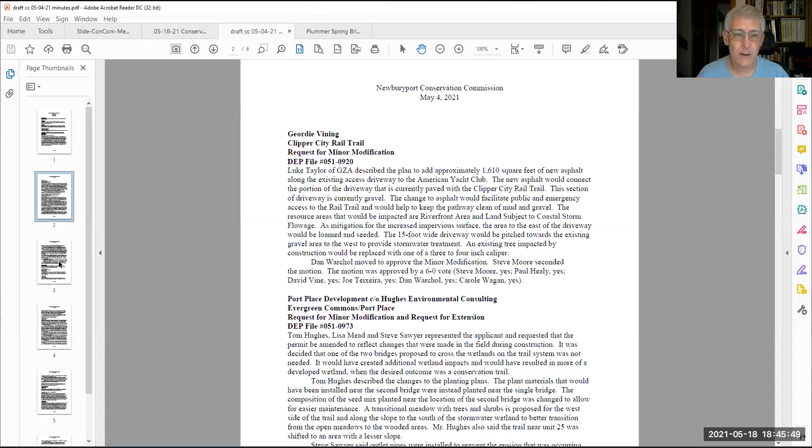One thing I have is I talked with Julie earlier - Gloria Brownhart, spelled Braunhardt, Gretchen. So if we can make that change. I think I pasted it from the agenda. You did, because I'm the one who spelled it wrong. I apologize.

Anybody else have anything? Motion to approve the minutes?

Second. Roll call: Paul Healy, yes. Steve Moore, yes. Dan Warchol - oh, Dan's not here, duh. David Vine, yes. Ron DeCola - I think I have to abstain, I wasn't at the meeting. Is that right? I think you can. Okay. Carole Wagan, yes. And I vote yes.

All right, next item is Plum Island updates. We have anything? We don't really, unless David or anyone else can think of something. We don't have any updates in terms of permitting or projects out there, work proposed or taking place.

Yeah, there's an MRBA meeting, I think it's next, the 4th. Is it the June Friday? The 4th. Yeah, a Zoom meeting. Okay, yeah.

And I assume we haven't heard anything further on that project. I guess it's with MEPA now. Julia, do you know if there's anything further? Yeah, no, you're right, David, it's with MEPA. The ENF has been submitted.

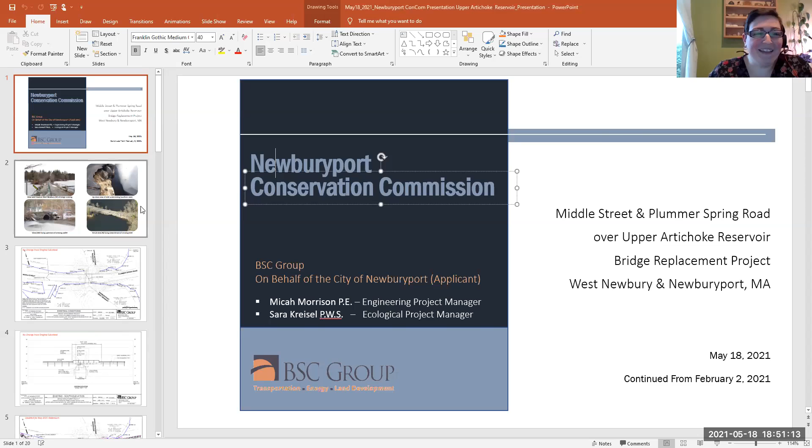Sure. The project straddles the municipal line with West Newbury, and an NOI has been submitted separately for the work proposed in the town of West Newbury. The proposed project is for the replacement of the structurally deficient bridge crossing of Plummer Spring Road over the Upper Artichoke Reservoir, which was closed in 2018 to vehicular traffic due to undermining of the paved roadway foundation. West Newbury has secured a $1 million MassWorks infrastructure grant for the design and construction of the replacement, and Newburyport has secured a $500,000 MassDOT small bridge grant for the design and construction of the replacement.

The NOI before the commission has been filed for impacts to bank, land under water bodies and waterways, bordering land subject to flooding, the 200-foot riverfront area, and the 100-foot buffer zone to bank within the city of Newburyport as a result of the proposed work. The project was previously presented to the commission on February 2nd of 2021. Commissioners from both the town of West Newbury and city of Newburyport met us for a site walk on Sunday, February 7th, 2021. Following discussion with the commissions at respective hearings and at the site walk, the proposed updates to the design before you today are concessions that the communities have made for increased stormwater treatment along the proposed roadway, which will result in the additional protection of the reservoir.

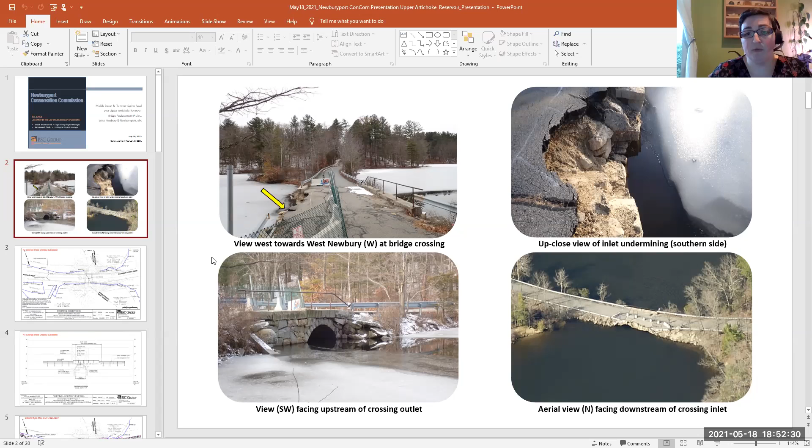The next slide, please. The roadway and bridge were originally constructed over the Artichoke River in 1891. The area was later dammed up and became the Artichoke Reservoir as it exists today. The bridge crossing itself straddles the municipal line between Middle Street, West Newbury, and Plummer Spring Road, Newburyport. The project occurs 0.4 miles west of the intersection with Turkey Hill Road, Newburyport, on an existing paved road, which is classified as a rural local road. The nearest house is more than 750 feet away. While the roadway is flat, removal of some trees along the slopes down to the reservoir will be necessary for access and construction. Next slide, please.

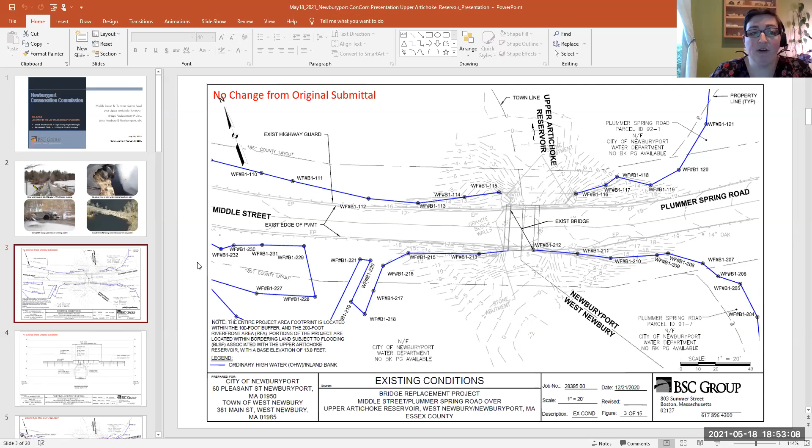The existing structure is a single span earth-filled stone arch and is approximately 14.3 feet wide, 13.2 feet high, and 24.2 feet long. Portions of the bridge, stone head wall, and southeast approach roadway have collapsed and the paved roadway foundation is undermined. The Upper Artichoke Reservoir flows northerly in an open water area and is bounded by protected forested lands. While bankful width for the Artichoke River is 28.4 feet as reported by StreamStats, the reservoir itself is much wider. The minimum width for stream crossing standards is 34 feet, but the proposed new clear span is 45 feet. Stream bed near the crossing is characterized by sand and cobbles with trace amounts of silt and gravel. The crossing is located within Zone AE for the 100-year storm event at and below the 13-foot base flood elevation.

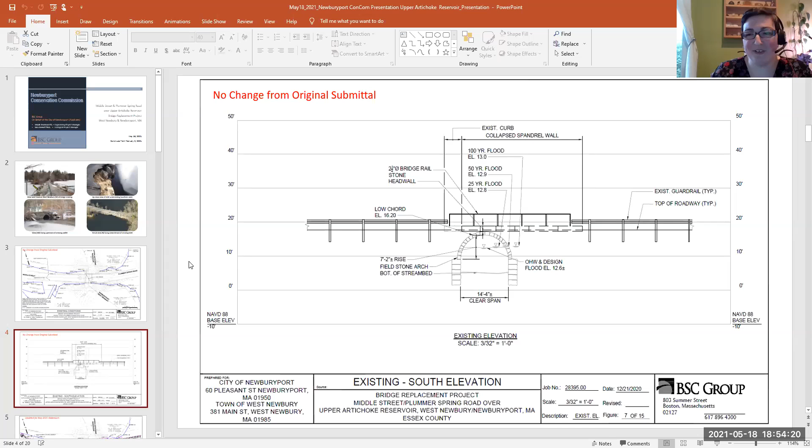The Artichoke Reservoir is a Class A public water supply and outstanding resource water. There is no rare species habitat in the project area, and neither the Upper Artichoke Reservoir nor the river are EPA impaired waterways nor cold water fisheries. Next slide, please. The proposed project is characterized as a redevelopment project, but will preserve undisturbed areas adjacent to the crossing to the maximum extent practicable.

The proposed project design complies with the Massachusetts stream crossing standards as required for a limited project under the Wetlands Protection Act. The crossing is proposed to be replaced by a precast concrete structure that will follow a similar horizontal and vertical alignment as the existing bridge, which will continue to have an open bottom with natural stream bed material. The proposed span length will increase from 14 feet to 45 feet. The overall width of the bridge will be 32.5 feet to accommodate safety improvements, including a sidewalk on the south side.

In accordance with the MassDOT Bridge Manual for a rural local road, the proposed bridge has been designed to meet the 10-year flood frequency storm event, can accommodate the 100-year flood frequency storm event, and increases the hydraulic opening by a factor of 2 compared to existing conditions. Additionally, while the low chord of the bridge will stay the same, the proposed roadway elevation will be 1.5 feet higher, which will help mitigate possible roadway flooding.

The proposed bridge will have a slightly larger footprint than the existing bridge, which will improve the openness and span size over the reservoir, which in turn will provide environmental benefits such as improved wildlife passage and connectivity. The increased hydraulic opening will better facilitate reservoir maintenance.

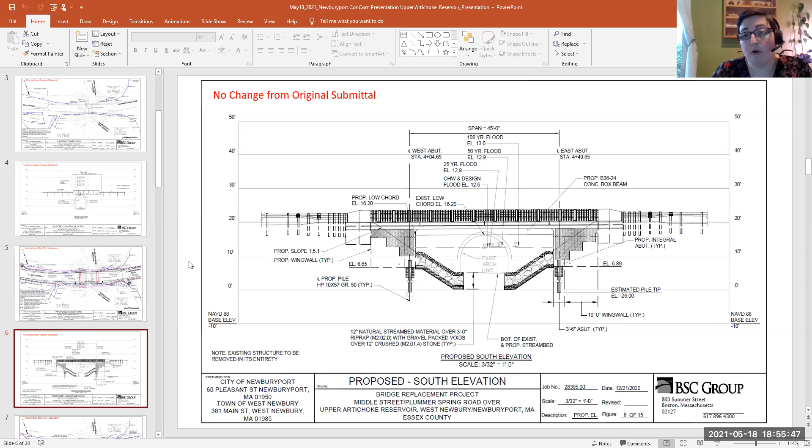The proposed permanent impacts to wetland resource areas have been minimized to the extent practicable, and all temporarily impacted areas will be reseeded with an appropriate seed mix. As a quick summary, impacts to land underwater, bank, and bordering land subject to flooding will remain the same as proposed in the original submittal from January 2021, and will be restored, replaced, or even increased to the extent practicable within the project area. No BVW impacts will occur as a result of this project, as there are no BVWs in the project vicinity.

Impact calculations to riverfront area have increased slightly, approximately 116 square feet, with the new water treatment elements proposed, and now approximately 1,333 square feet of permanent impacts to riverfront area are proposed in Newburyport. An additional 154 square feet of temporary impacts are required also for construction.

Erosion and sedimentation controls will be installed prior to construction to protect the waterway and will be removed upon completion of the project once the site is stabilized. Work will occur behind cofferdams so that the work can occur in the dry, but the exact methodology is up to the contractor. As discussed in our last hearing, the contractor is to prepare dewatering and stabilization plans, and they'll be required to submit them to the Conservation Commission for approval prior to the start of the work.

Existing conditions in Newburyport utilize country drainage for stormwater treatment, and the NOI submittal from January 2021 proposed no additional treatment. The municipalities now propose the addition of 2 deep sump catch basins on either side of the roadway, just before the ends of the retaining walls. The deep sump catch basins will flow to a 900-gallon water quality unit. From there, runoff is directed south to a flared end section that discharges towards the reservoir onto a stone splash pad. These additions will ensure the treatment of some of the stormwater entering the reservoir by reducing the amount entering by country drainage. The project limits will generally stay the same as previously proposed.

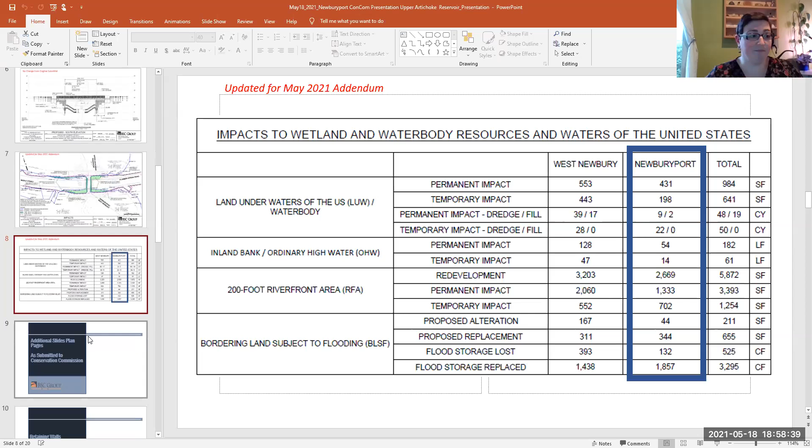And there's additional slides that have been presented as part of the plans if we need them for discussion purposes.

I have a question. What will happen to the wildlife that lives in that water currently? Because I know there's fish and I've seen swans, and I'm sure there's other creatures. It's currently 14 feet wide, the opening right now. 7 feet will be maintained, so there's actually going to be continual water passage allowable.

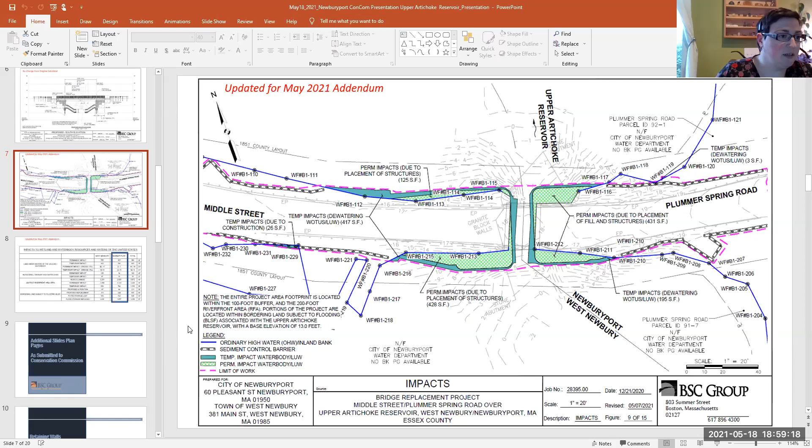Do you want to, Julie, if I can trouble you, go down a few slides? We had that right below shield. Yeah, that one right there. So you can see that the open water area will be maintained during construction. I'm sure Micah could speak better to that than I could, if you have additional questions for it.

So that's the 7-foot wide maintained zone of water flow through there? Correct. Actually, I believe it's slightly larger than 7 feet. I think Army Corps requires us to maintain a minimum of 50% of the original opening.

I remember back in February when we met in the field there was some question about removal of some trees. Was that resolved? It appeared that in order to build it there were additional trees, at least in West Newbury. Can't recall about Newburyport, but I remember there was some issue about whether you might have to remove additional trees. The Newburyport and West Newbury Commissions wanted to know how many trees are going to be removed, I'm going to find that document right now for you.

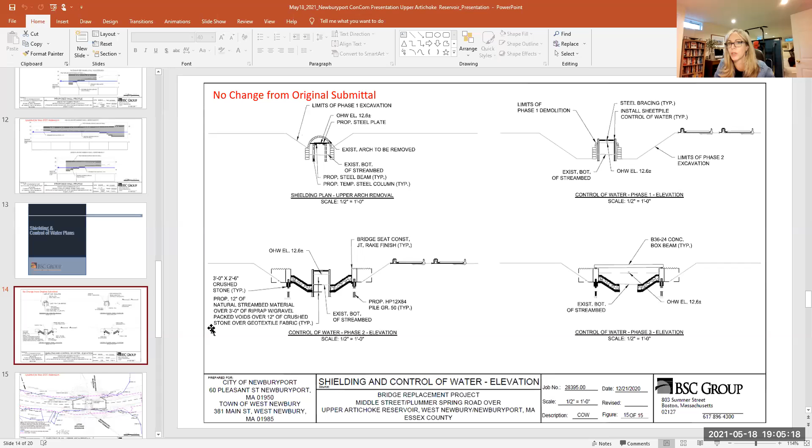There was an article in the Daily News last week about the increase in construction costs, and there was a throwaway sentence that said something about Newburyport having a lack of interest in the project, that's all it said. Do you know what that's about? No one's telling me that stuff. I haven't heard that, it'd be interesting to see what that was about. Was it the reporter, or was someone quoted in Newburyport saying that? It was the reporter, I believe. The cost increase implied that Newburyport didn't have any interest in the project anymore, which I found hard to believe. Maybe there was just no interest in paying any more money. I can only guess.

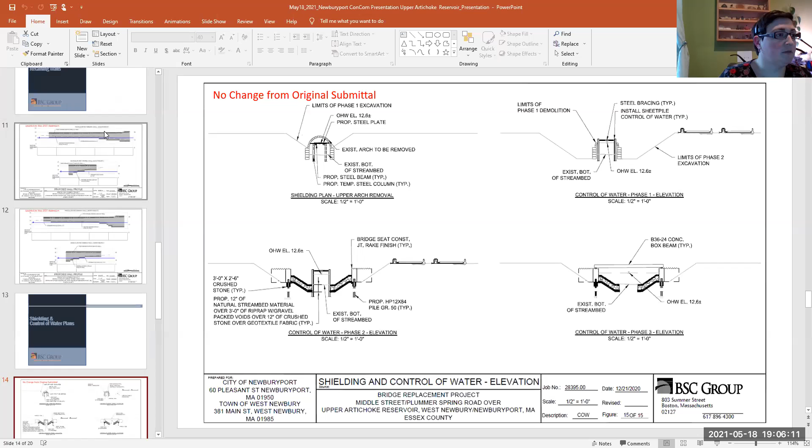One more. Okay, two more, sorry. I'm sorry. Right, we there, go.

There's 116 square feet of additional impact to riverfront area where that stone pad is. Yeah, okay. But that's the only impact, there's no additional impact to land underwater, bank, or BLSF.

So where that stone pad is, is that at the bottom of the slope? Is it at water level, above water level? What's the elevation of that actual outfall riprap?

It would be above the water level. I don't know the exact elevation, but I can get that for you. Okay, so I'm just wondering what type of impacts the construction of that little zone is having.

It sounds like it won't add to the number of trees coming down though, correct? No, we chose it in a location where it would have as little impact as we could muster. Okay, it looks like it's above the high water line, right? Correct, yeah.

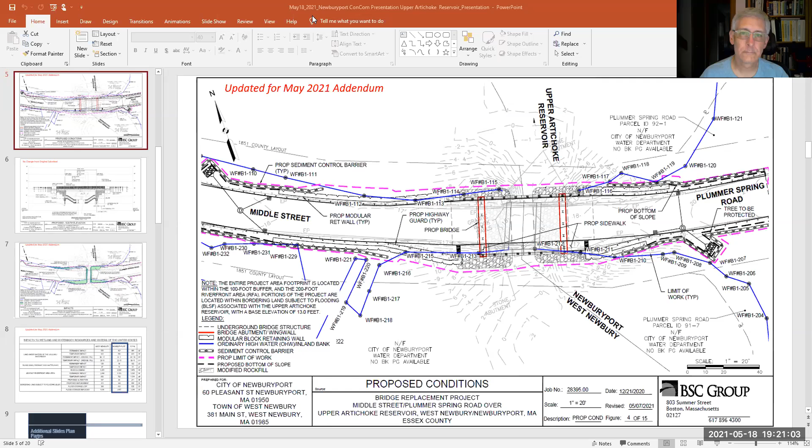So we can go to enforcement and violations. Go ahead, Julie. We discussed the Gloria Bronhardt Trail at the last meeting and the work that was taking place up there, which shouldn't have been and was in violation. So the notice of violation we talked about sending out was just sent out yesterday. I put the date of June 1st for a response from Jerry Mullins on that, so this will be on our next agenda.

All right, so we'll do that next time. Now, orders of conditions for the City of Newburyport Upper Artichoke Reservoir Dam, notice of intent 051-1047.

So they've revised the plans to show the water quality units and the discharge. The only special condition we discussed related to those new elements of the plan was about protection of the tree. So the special condition I drafted was: construction of the water quality unit shall not impact the tree to be protected as shown on the approved plans. If necessary to protect the tree, the location of the water quality unit may be adjusted and changes submitted to the commission. Does that sound good?